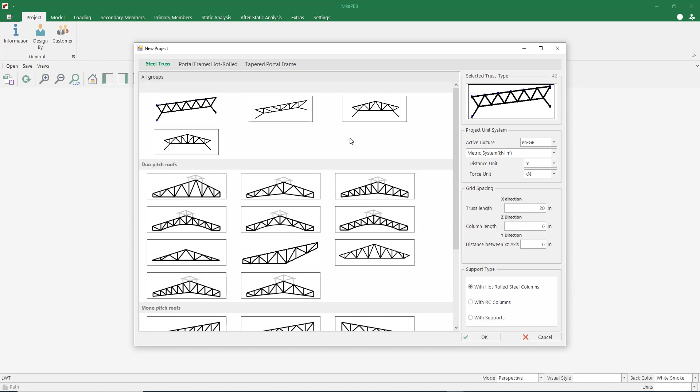I switch to the PEB tab and select type 510. Let our truss span be 30 meters. Our column height is 8 meters. Let's keep our axis spacing at 6 meters. Now, the program is creating our model.

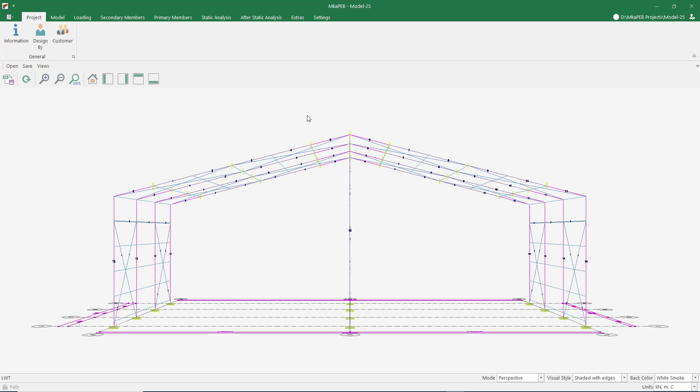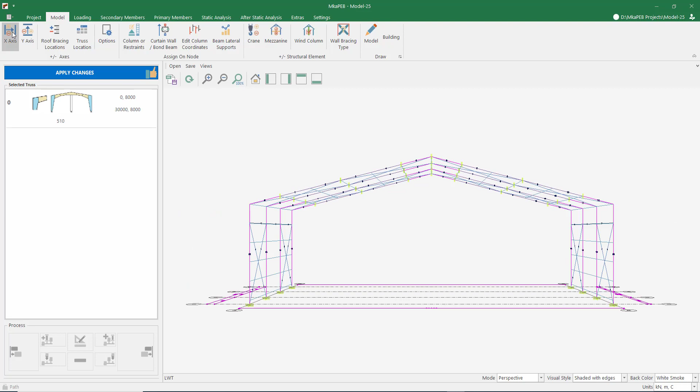In this example, we won't have a column in the middle. I'm removing the middle column using the Column or Restraints command. To change the dimensions of the frame, I click the X-axis button and select the relevant frame. Then I press the Edit button.

Let our ridge height be 2 meters. I want the purlin spacing to be around 1.5 meters. It's 1.38. The DCY parameter determines the beam start haunch reinforcement height. Let's make this part 0.8 meters.

The DCX parameter determines the width of the column top. Let's make this part 1 meter. DRY is the height of the ridge point. Let's make this part 0.7 meters.

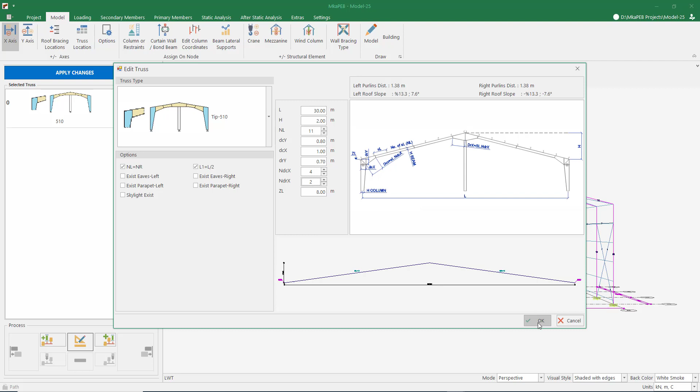The reinforced part will extend from the corner across 4 purlins. So roughly 1.38 meters times 4 is around 5.5 meters. The reinforced section in the ridge will continue for 2 purlins. I close this menu by pressing the OK button and update my model by pressing the Apply Changes button.

Let's change the length of our building to be 60 meters. A building like this. The program placed the diagonals by skipping 2 axes. I can replace them if I want. But right now it's fine. Therefore, I am not making any changes.

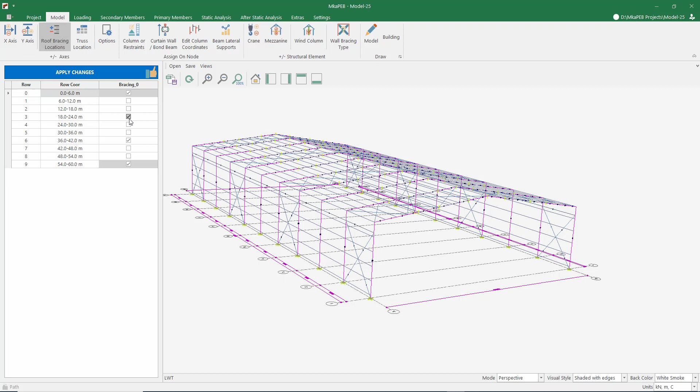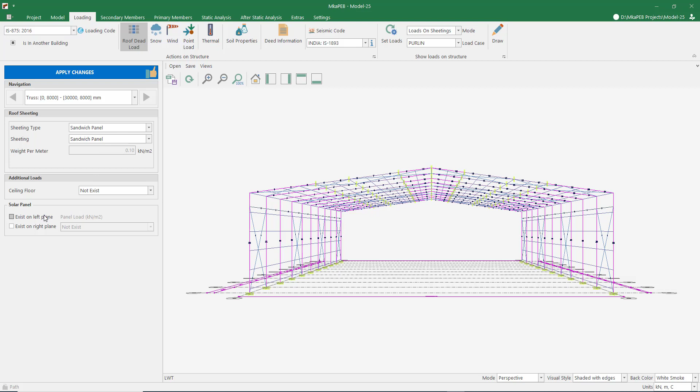Let's look at the load section. There are several load codes in the program. I assume this project will be done in India. Therefore, I choose IS 875 as the load code. Let our roof covering be sandwich panel. At the bottom, it is possible to define a solar panel on our roof if we wish. However, we will not use solar panels in this project.

Let's take a look at the snow load section. There is no snow load in the area where the structure is located. However, I still define a snow load of 15 kilograms per square meter. You can assume this load as a rain load.

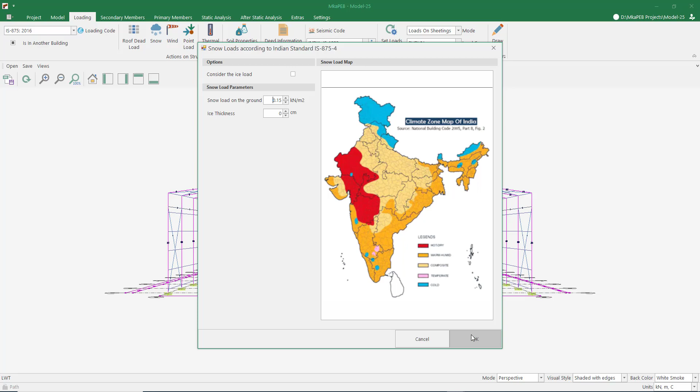Let's move on to wind load. Since our building is in India, we will use IS 875 as the load standard. Let's say our building is located in a region where the wind speed is 44 meters per second. Therefore, I choose this region. Somewhere in this area. You can change the internal and external pressure coefficients from this section. I change it to +0.2.

I'm assuming our building is inside the city. So I choose terrain category 4. I close it by pressing the OK button. We can add a point load to our roof with the Add Point Load command. We do not have a point load in this project.

Let's take a look at the thermal loads part. The standard used here is EN 1991-1-5. Let the indoor temperature of the building be 25 degrees in summer. Let's set the winter internal temperature to 20 degrees. Let the highest temperature be 40 degrees and the lowest 10 degrees in the place where the building is built. We erected our building at 25 degrees.

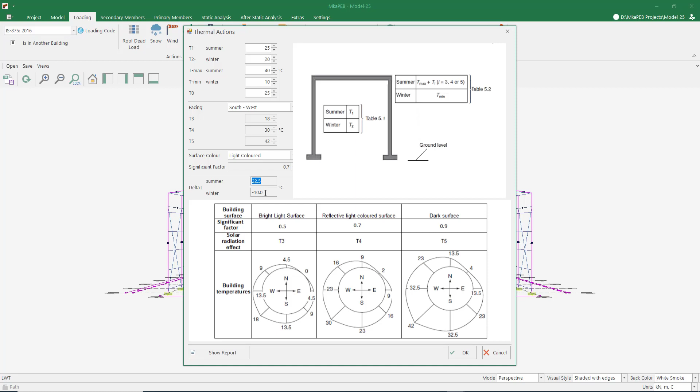The long side of the building is in the southwest direction and the outer covering is light colored. In this case, our building will be exposed to a temperature difference of plus 22.5 degrees in summer and minus 10 degrees in winter. We will use these values in the calculation of the column braces.

When we select India as the load code, the earthquake code automatically comes as IS 1893. Let our soil class be a poor soil, I choose Type D. Now let's choose the city where our building will be built. The program will automatically recognize the earthquake zone according to the city we choose. This is a moment frame system. Let's keep our live load participation coefficient as 0.5.

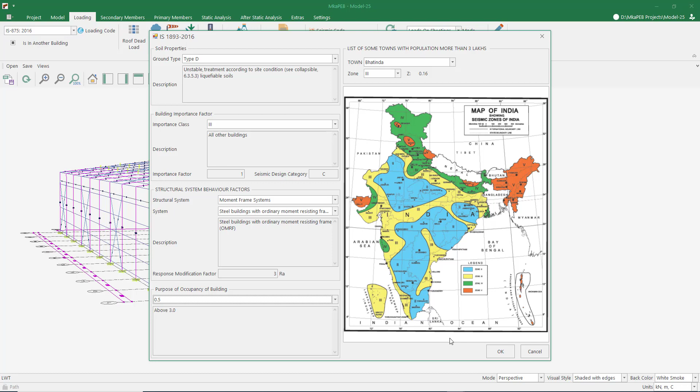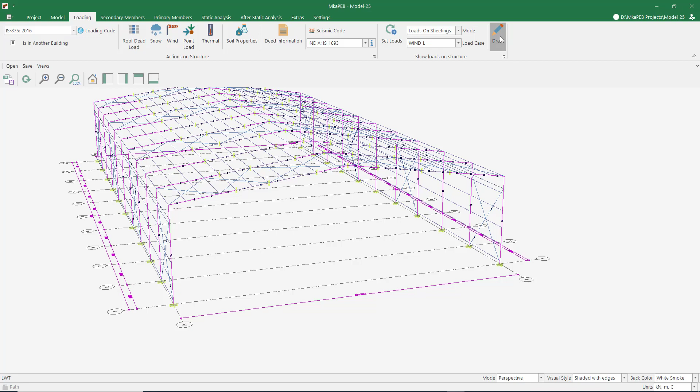The program has automatically assigned the loads we have defined so far to our model. Let's review the assigned loads. The most complex loadings in steel structures are wind loads. Let's take a look at wind loads first. The program calculated the wind loads acting on the roof and automatically assigned them to the relevant elements. It can do this in 4 different directions.

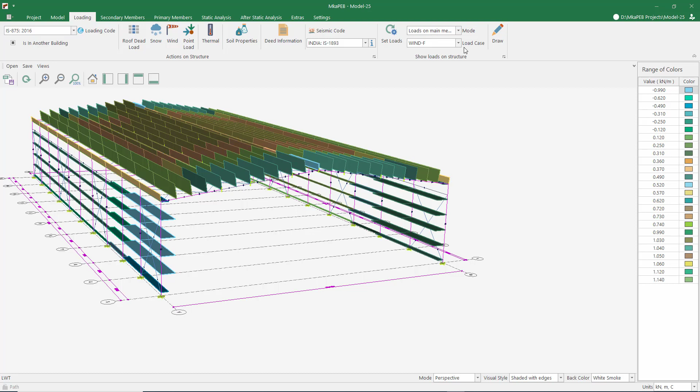You see the distribution of the respective loads on the roof purlins. We will use these loads in the calculations of roof and facade purlins. It automatically transferred these loads to the main frame system, and these loads are used when static calculations of the main frame system are made.

After this stage, let's move on to the secondary member elements. These elements are roof purlins and wall girts. If there was a crane or a mezzanine in our building, their secondary beams would also be our secondary members.

As a steel structure design standard, the program includes Eurocode, Turkish Steel Structure Code, American Steel Structures Code, and IS 800. Let's use IS 800 first, and try the American code later.

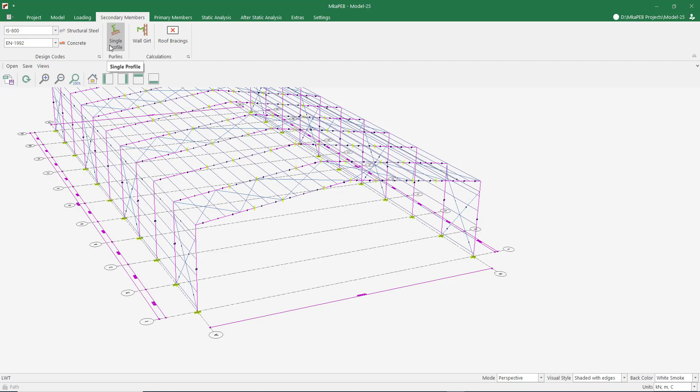When cold-formed steel elements are used as roof purlins, the program uses EN 1993-1-3 as the design standard. From this section, we can define sag rods for roof purlins. We can make purlins simple or continuous. If we wish to change the purlin sections using these arrows, we can use the same section for both purlins.

I chose C200-20 purlins, and I use a single sag rod.

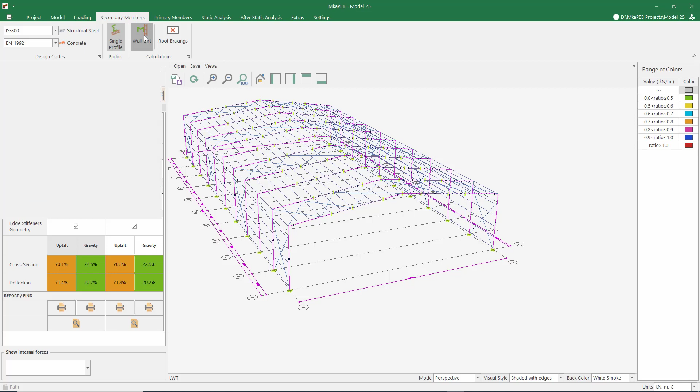Now let's take a look at the wall girts. Wall girts are on the A-axis and B-axis of the building. You can change the number of wall girts from this menu, but I wanted to stay around 1.5 meters. Let them stay like this for now.

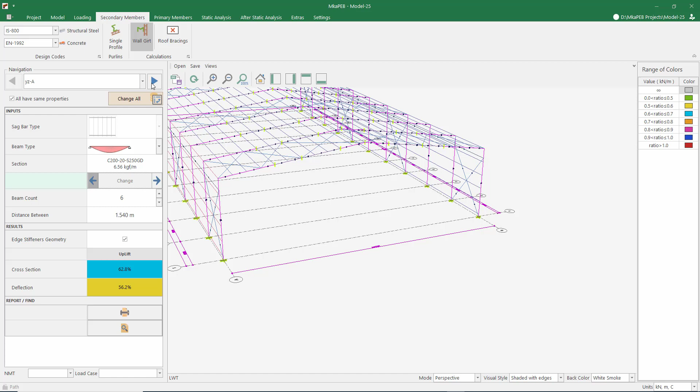C200-20 section seems to be sufficient here as well. Let's look at the other axis. There is no problem there either.

The design of the secondary elements is finished. Now let's assign the cross-sections of the main frame system. Let's start with the columns. I select the columns at 0 and 30 meters.

Facade cladding is sandwich panel. First, we choose the flange width and flange thickness of our profile. Let's choose 150 mm by 10 mm. Let's choose 400 mm as the height and 8 mm as the web thickness.

If the height and web thickness we want are not in the list, we can define and use any section we want from this menu. As we can see, the section we defined has been added to the list.

However, I want to use the 408/150/10 section. I choose S355 as the steel grade. By pressing the Apply Changes button, our column sections are assigned.

Let's assign the beams. Let's make the material quality of the beams S355 as well. Let our flange be 150 mm by 10 mm again.

The section I want to use this time is 410/150/10, but this section is not in the list. Let's create this section.

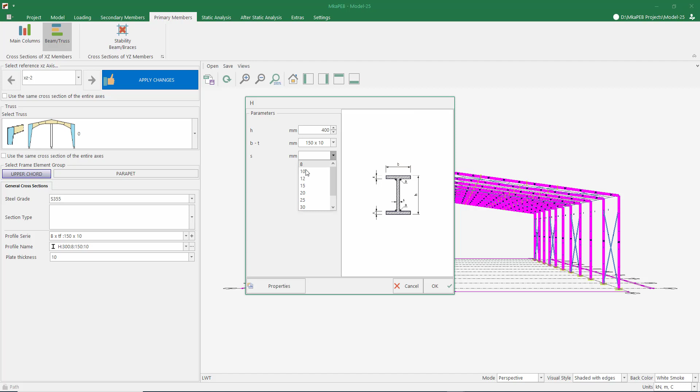My section is on the list. I choose 400/150/10. I misassigned the column sections.

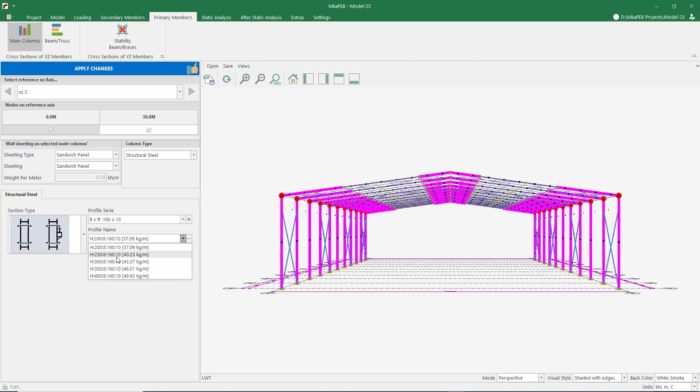Let's fix this. Again I select the columns at 0 meters and 30 meters. I change the flange to 160 by 10. I will choose the height and web thickness as 400 by 10. This section is not on the list. Let's add it.

Now our column and beam sections are correctly defined. Let me show you the sections we have defined.

The easiest way to see the cross-section of the building in the program is to look at it through cost analysis. I open the XZ2 axis.

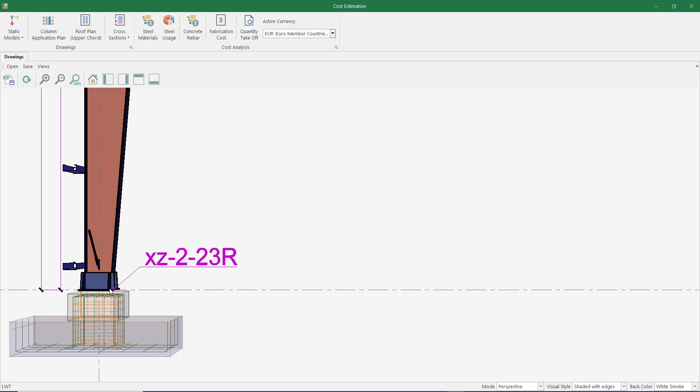The column section we selected is the column starting section you see here. We made the definition of the height value at the top of the column from the Edit Truss menu.

When choosing the beam section, we chose the middle section. We have entered the heights at the beginning and end of the beam in the Edit Truss menu.

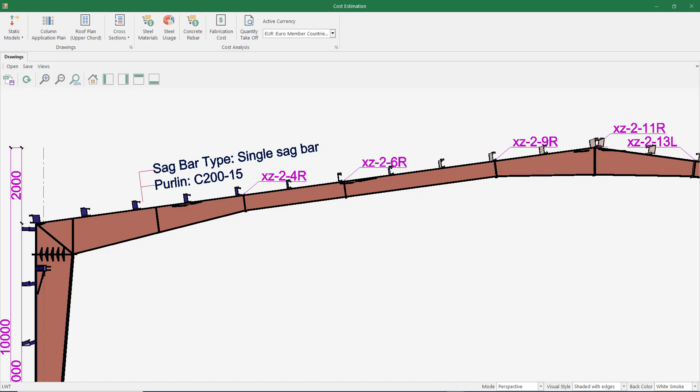Now let's do a static analysis of this system once.

Static analysis complete. After the static analysis, the design menu opens on the right. Here we have seen that the cross-sections of the rod braces are insufficient. We need to change them.

Let's take a look at the XZ axis. In this axis, my main columns are at 66% capacity. My main beams are at 75% capacity.

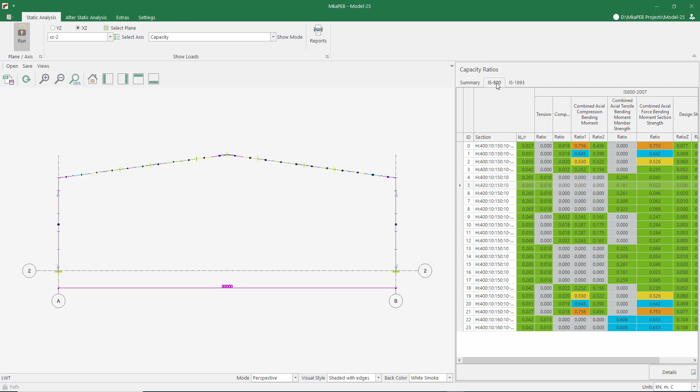In the earthquake regulation section, slenderness checks were made. We calculated with a positive 0.2 wind load coefficient. We also need to calculate for negative internal pressure.

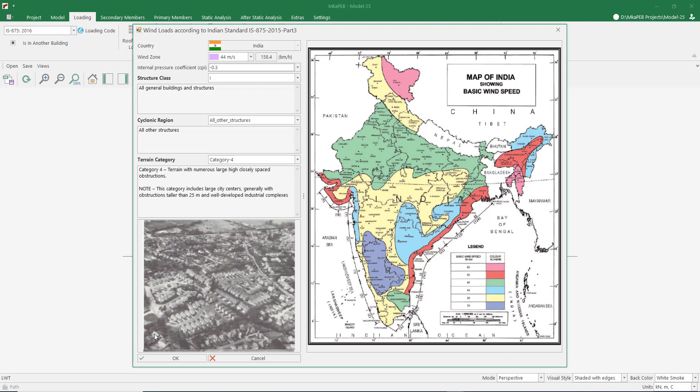For this, I first set the internal pressure coefficient to negative 0.3 from the wind loads menu. I have to choose whichever option is more inconvenient.

In the previous analysis, the columns had a higher ratio. For this reason, I have to calculate according to positive 0.2. I correct the pressure coefficient to positive 0.2, and I correct it again as positive 0.2.

I know that the column braces are insufficient. I will use the same cross-section for all of the column braces. Here I will use a 30 mm diameter rod instead of a 20 mm diameter rod. I think this diameter will be enough. Instead of rods, we could also use L or pipe cross-sections.

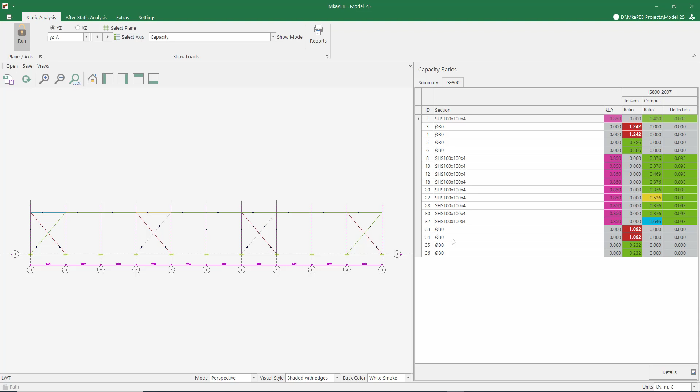Our rate dropped to around 1.1, but it was still insufficient. Let's take a quick look at the internal forces coming into these diagonals. First, let's look at the normal force diagram under earthquake load. We now see the axial force diagram. All of the diagonal members we've seen here have been subjected to tensile forces.

The elements that receive the pressure force are excluded from the static calculation. It was made in static calculation according to thermal effects. When you click on the relevant element, we can see the incoming force. The braces in the middle receive a compressive load under thermal loads. Since the rod sections could not carry the pressure load, the braces on the side had to take the whole load.

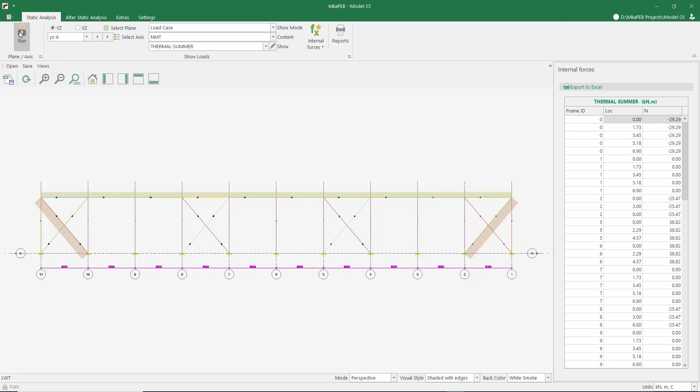Let's go back to the capacity section. The capacity of our braces is over the limits, so let's change the cross-sections of these elements. This time, let's use an angle section instead of a rod section. For example, let's choose a 60 mm by 6 mm angle.

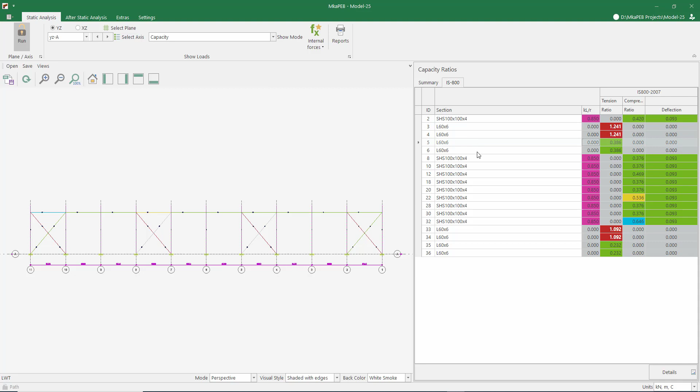Let's do static analysis again. The 60 mm by 6 mm angle sections gave close results to the 30 mm rods, so I'll have to use larger cross sections. This time I will use an 80 mm by 8 mm angle, and I will use the same section on all axes. Instead of 60 mm by 6 mm angles, I choose 80 mm by 8 mm angles.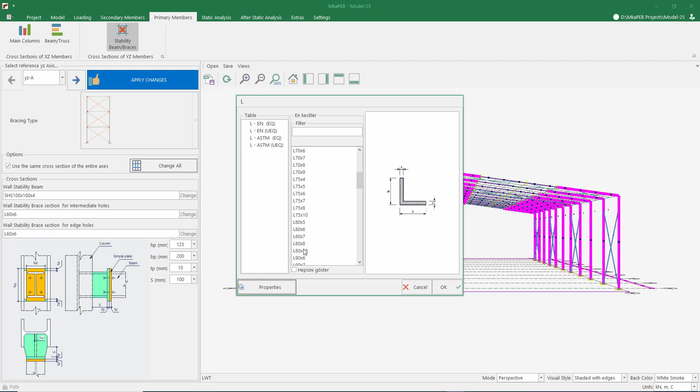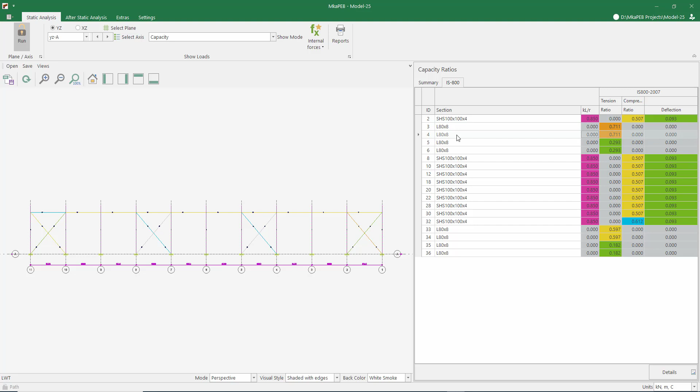Let's do static analysis again. My column braces are now running at 70% capacity — this is a pretty good result. Let's take a look at the main frame system. My columns and beams are running at 65 to 75% capacity.

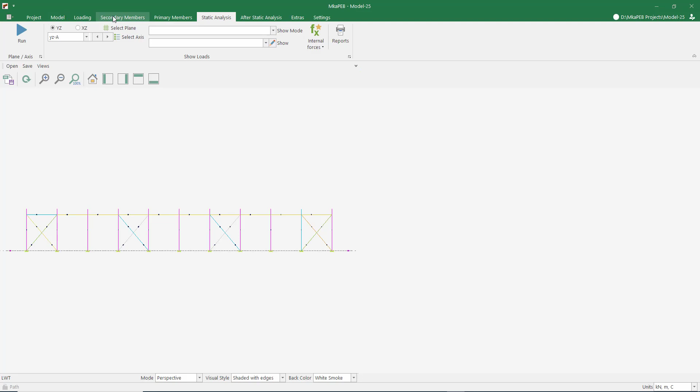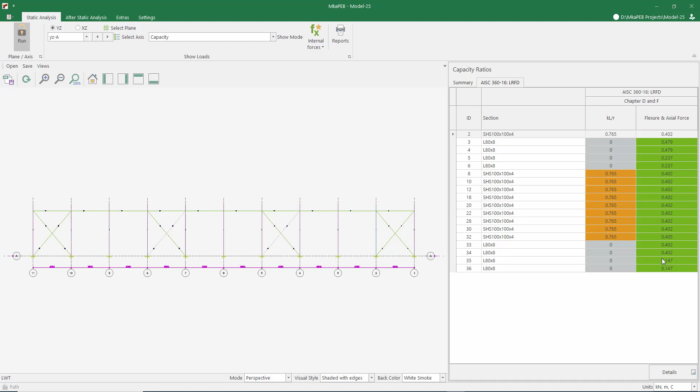Let's make a change now. Let's try AISC 360-16, the American code, instead of the Indian code. Our braces are now running at lower ratios. This is due to the difference in load combinations in the American codes — sections that are sufficient at 0.7 ratios in the Indian codes are not sufficient according to the American codes.

This is due to the lateral buckling length. To fix this, we go to the Beam Lateral Support menu from the Model tab and add lateral support to the beams. Now let's add lateral supports at regular intervals.

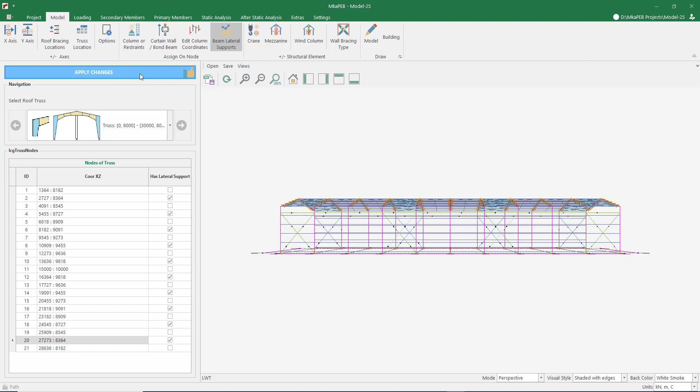There is no problem with our braces. Let's look at the main frame — now the capacity of our beams has been improved. However, our column capacity is still insufficient. To fix this, the compression flange needs to be held in the columns, just as in the beams.

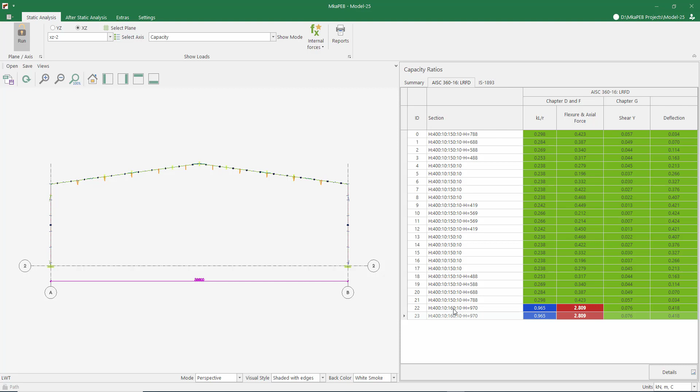To do this, let's move on to the model screen first. We will now define fly braces from the girts to the non-held compression flanges of the columns, as in the beams. Let's go to the Secondary Members tab and click on the girts.

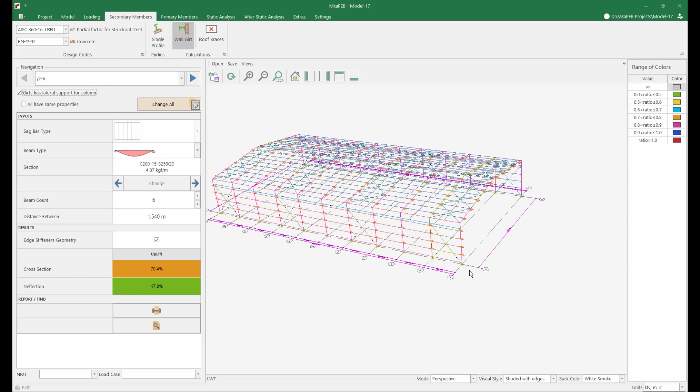Now let's tick the Girts has lateral support for column button. As you can see, the program has defined lateral supports for the columns on this axis. Let's repeat the same process for the other axis. The columns on both axes now have lateral supports.

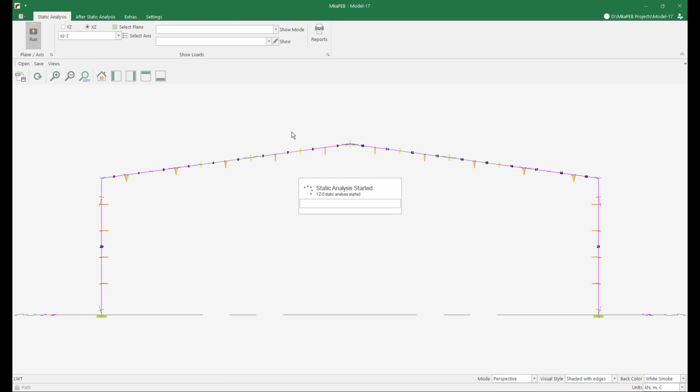Now let's do static analysis again and see the difference. Static results on our long axis are the same. Let's look at our other axis — as you can see, the column capacity ratios have decreased dramatically.

Now let's take a quick look at how much steel we use from the cost estimation menu in the tab after static analysis. I open the list by pressing the steel materials button. We used 28.56 kilograms of steel per square meter.

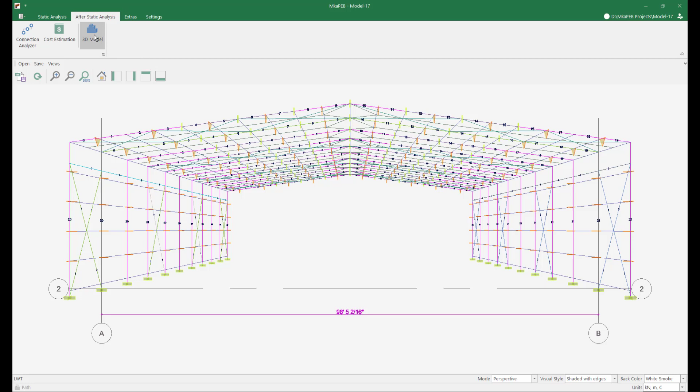Now let's take a three-dimensional model drawing and examine our column supports over the three-dimensional model. For this, we press the three-dimensional model button from our tab after static analysis and press the draw button from there. Now the program is preparing our three-dimensional model — this process may take a few minutes depending on the speed of your computer and the size of the model.

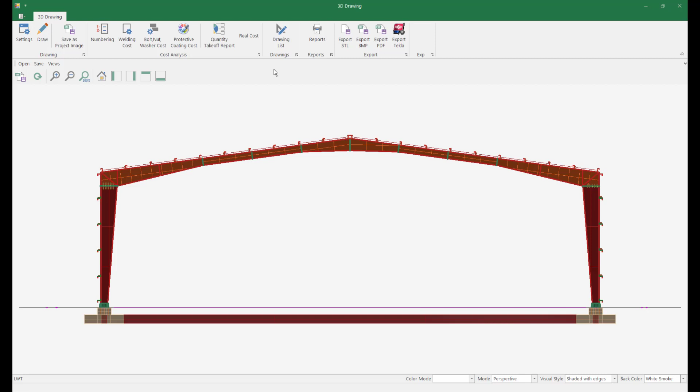Our model is ready. Now let's look at the lateral supports in 3 dimensions. As you can see, the program has placed lateral supports from the wall girts to the free flanges of the columns.

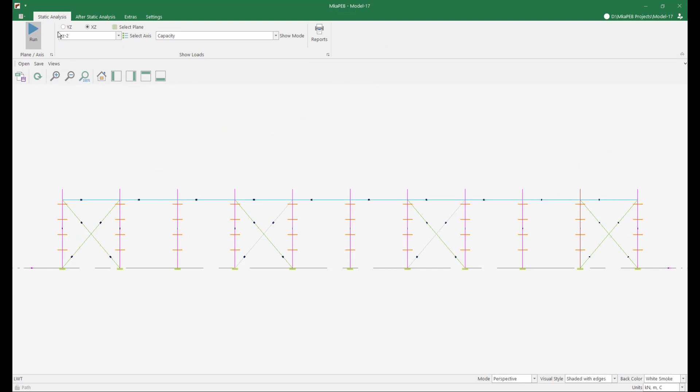Now let's close this and define wind columns on the front and back of our building. To do this, let's first unlock static analysis and go back to the Model tab.

We press the wind column button to define the wind column. We are at 0 meters coordinate. Let our sheeting type be sandwich panel. If you wish, you can choose different sheetings from this menu. I chose IPE300 as the wind column.

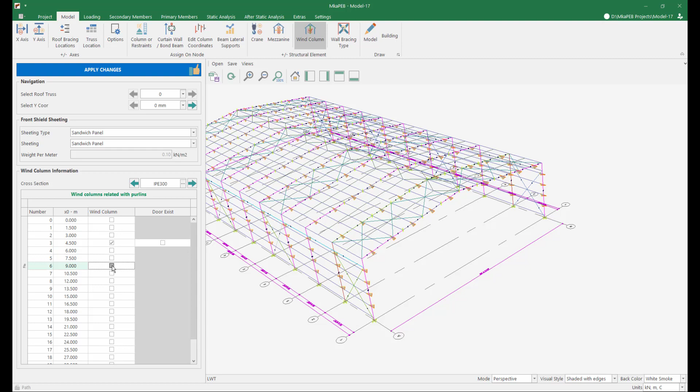Now I define the wind column by choosing the points I want. The points you selected will be displayed as red dots in the program. Let's choose the other part symmetrical. I chose points 3, 6, 10, 14 and 17.

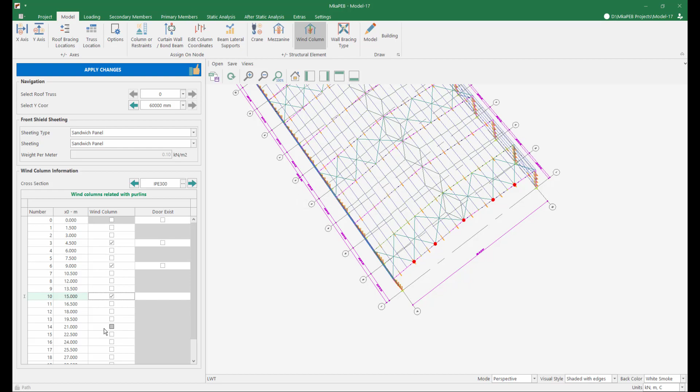Now let's define the columns at the 60-meter coordinate. I will choose a sandwich panel again as the coating type and make the columns symmetrical with the 0-meter coordinate. I will choose the same points again and make them symmetrical. Let's place our columns by clicking the Apply Changes button.

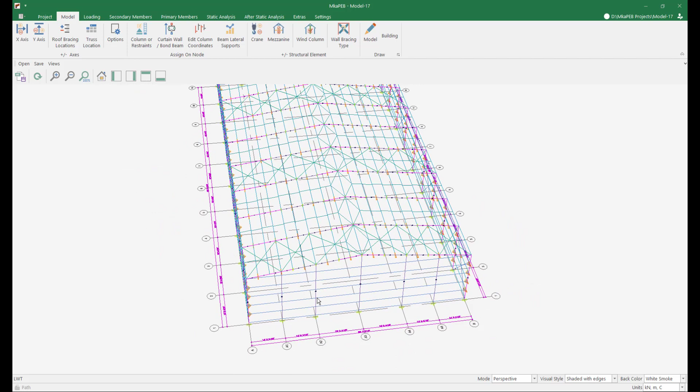Now let's define a gate between the axes A1 and A2. For this, let's click on the wind column button again, and press the Door Exist button next to the column we want to open a door for. As you can see, the program has defined our door. Door height is 5 meters as standard.

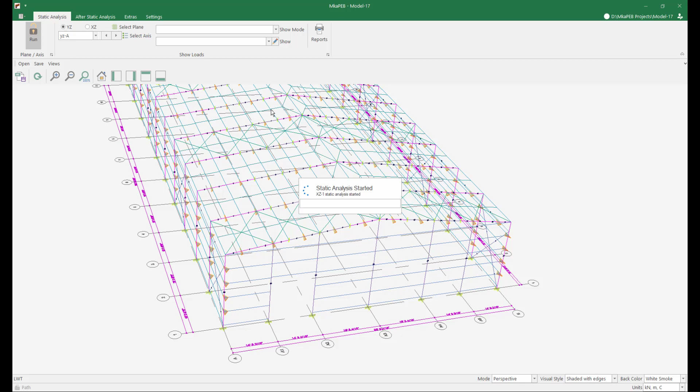Now let's do the static analysis for the wind column case again. Static analysis complete. The ratios on the y-axis have changed somewhat due to the wind loads coming from the front and the back face of the building. Let's look at the x-axis.

Now we have two static axes. The first is the wind column axis, and the other is the inner axis. Now let's take another look at our cost estimation menu.

This time we used 31.89 kilograms per square meter of steel. The reason for the increase is the wind columns and purlins added to the front and back of the building.

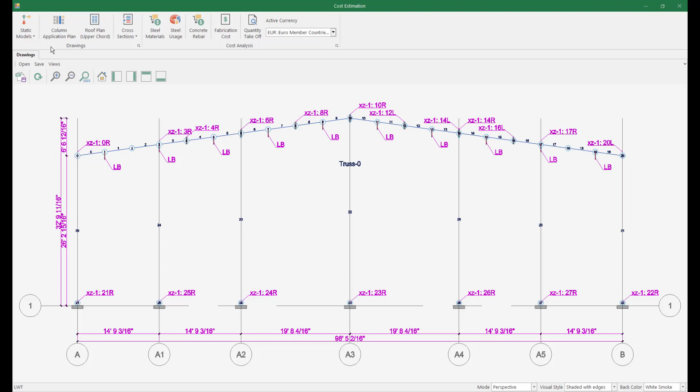From this section, we can look at static model drawings. Here we can see the element and node numbers, the connection names and the lateral supported beam sections. Now let's look at the static drawing of the long side. We can also see the nodal points and bar numbers in the same way.

Here you can see the column application plan.

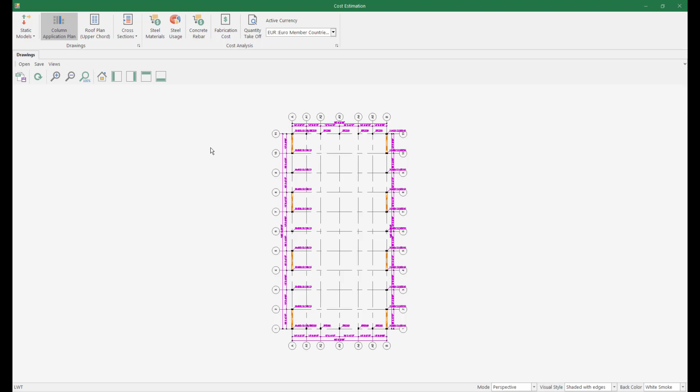Let's take a quick look at the reports. You can access the detailed report of each element in the program. Reports are prepared in great detail and are supported by visuals.

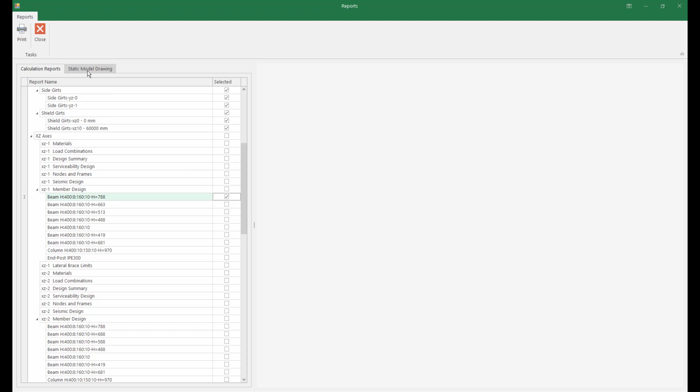Let's pick and see some reports. I choose the loads, purlin calculations and one variable section calculation as an example. Let's prepare the report by pressing the print button.

The program started to prepare the reports of the sections we selected. This process may take a few minutes depending on the complexity of the model.

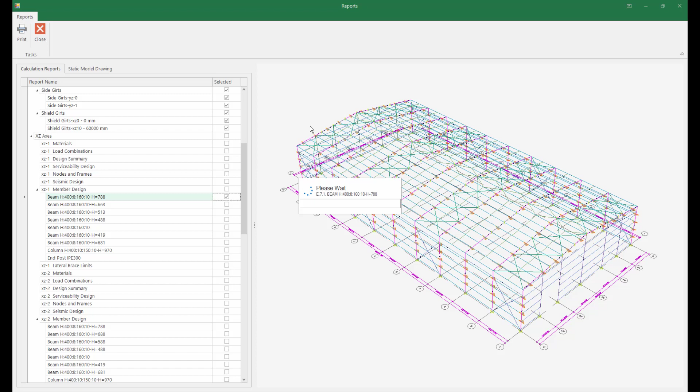Our report has been prepared. Now let's take a quick look at the details. As you can see, all the necessary details are given. In addition, loads are shown graphically.

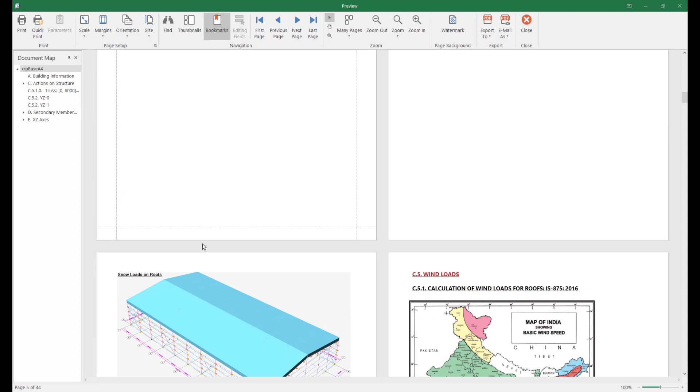It is clearly written in the tables and codes used. Each parameter is clearly given. Complex wind loads are given graphically.

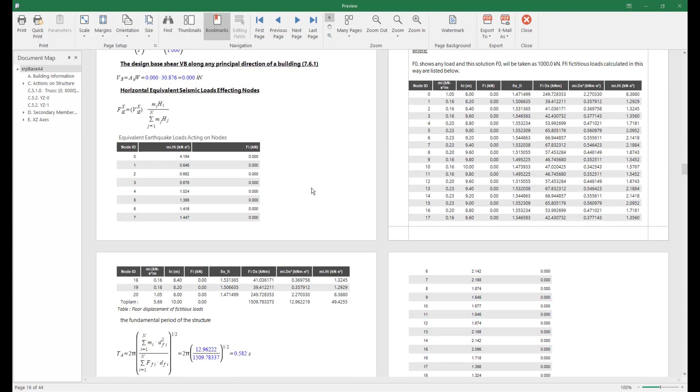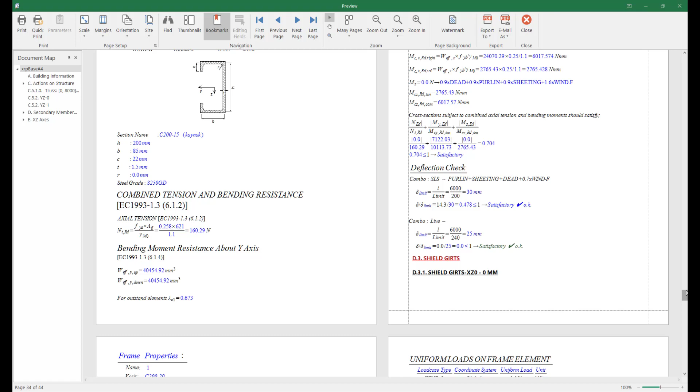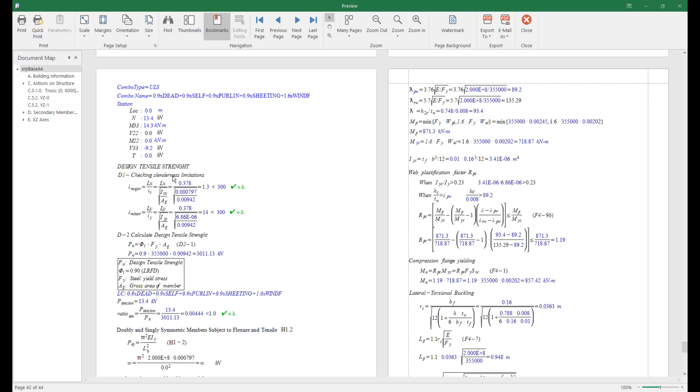Calculations related to variable cross-section were made according to the selected regulation. All formulas used are clearly given with their references. In this way, the account report can be easily read and followed. You can save the report in PDF or image format and print it directly if you wish.